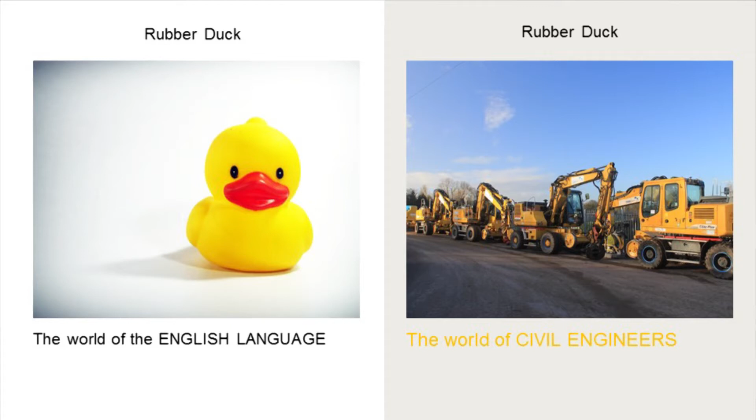I'd like to talk to you this afternoon about something to get your energy levels up after lunch. I want to talk to you about rubber ducks. We've all had them, we've all owned one, probably got them at home in the bathroom. But the English language is our biggest enemy. P-way engineers in the room, quick show of hands - you all speak English, you all know what you mean when you say bring me a rubber duck to site, don't you? Civil engineers in the room, quick show of hands - when you bring a rubber duck to site, it looks a bit more like this. We've got a problem here, guys, haven't we? We're talking a different language. We're saying the same words, the same English language, but it means something completely different depending on your point of view.

So when we talk about platforms, it's all about the focus. What's our perspective on life? As a civil engineer, this is my point of view, this is my focus - the coper. I don't know my pacer from my pendolino. And the X and Y standard deviation speech we had before lunch, that was way over my head. I take my hat off to you guys, P-way designers, I was struggling to follow some of the maths there, far too complicated. Civil engineering, we like things simple. We like to know where we're going.

But we've got to communicate better. This is our problem, I think. CEMs in the room, you'll know how difficult it is to chair IDC meetings - getting the civil CRE, the design CRE even, and the construction CRE from the same discipline to talk the same language can be difficult sometimes. But the consequences of getting that conversation wrong can be massive. Get it really wrong and we end up with conflict, we take chunks out of the concrete. Probably more likely we'll create difficult access. And for an ageing population, as we've just seen from Neil's presentation, this isn't acceptable to us in the railway anymore. We've got to look at ways to improve this.

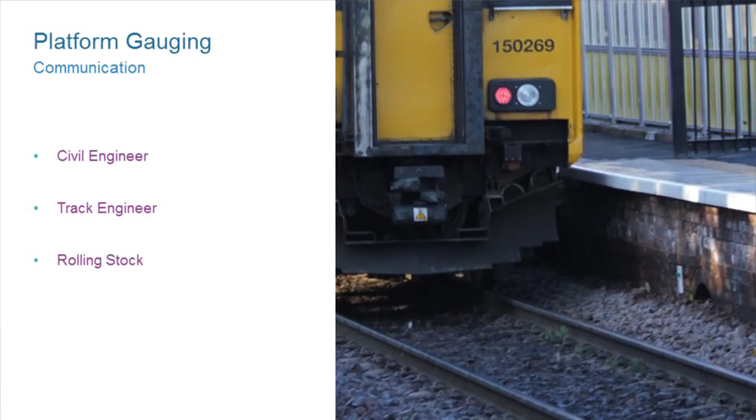So collectively we've got to get three communities to communicate better together. We've got to get our civil engineers to understand what the track and the rolling stock communities all want, and we've got to bring that together to get the perfect solution. And that means we've got to define our rubber duck, we've got to talk the same language. If we can all do that as a community, we've taken the first step of three steps into simple platform design.

So the next 10-15 minutes, I'll talk to you about some of the definitions. I was sweating a minute when Neil started to interpret group standards, but thankfully he said exactly the same as I'm going to tell you, so no worries there. I'm going to look at compliance and tolerances as well - does tolerance matter? And maybe break some of the misconceptions in the room. And I'm going to hand over to my colleague Nick Highton, who's going to talk about some of the challenges faced on site - how do we achieve these setting out strings and the tight tolerances to get us to this perfect stepping distance.

So the first thing I learned fairly recently, actually talking to some P-way engineers, which way is up? Where is the origin? Where is 0-0? And it comes back to this track design string, the maintained position of the track. Completely in agreement with Neil - this is a single point, it's a theoretical point. It is not where the running edge of your track is measured on site, it's a different thing. And the relationship is from that 0-0 origin to a space somewhere in that 730-915 envelope, somewhere. And that's where a little bit of the grey area starts.

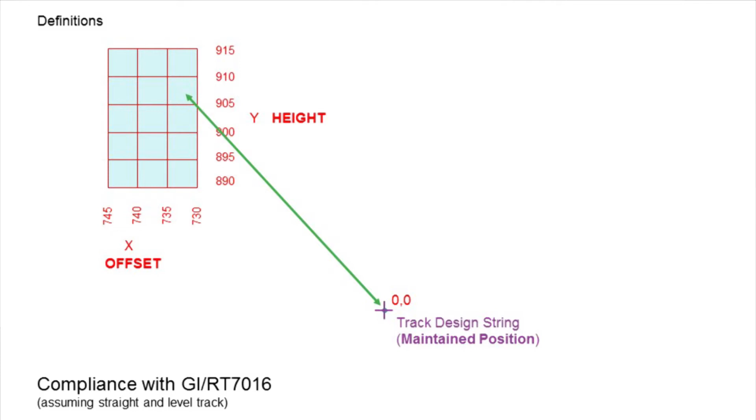I would point out at this point, this is straight and level track. When we get into curvature and cants, things do start to move around a little bit. And the grid system shown here is a 5mm grid. To put that in perspective, this grey box you see here, for those with a programme, there's a little grey box drawn to real size. For those with a mobile phone with a camera on the back, you've got a cover on it with a gap for that camera - it's about a similar size. So we try to lift this really heavy piece of concrete, the coper, and fit it down so that the edge, which is a curve, hasn't got a sharp edge on it - the theoretical edge of that corner is somewhere in that box, and it's not very well defined. So our rubber duck is already starting to look a little bit vague.

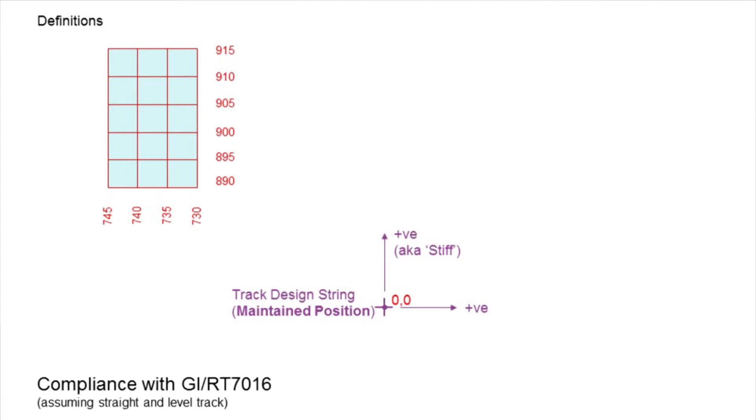So we've got to get some consistency in the P-way community. A positive dimension being measured on site needs to be vertically up or stiff in your language, not a lift and slew to go. Sometimes I've seen lift and slews to go with a positive number, meaning that the track is actually lower than that origin. So we start to get confusion, and we've got to overcome that.

Then we pass it on to the civil engineer. And what does he try to do? Well, there's this gauging position and a coping design string position that he wants to put in his 3D BIM model. And then there's this construction tolerance. So let me just take a moment to explain those three elements.

The gauging position is the top right-hand corner, as it appears on the screen, the highest, closest point relative to the track that we are going to allow a coper to be positioned to enable us to get positive clearance. That's not the same point that the civil engineer will use to position the corner of the coping stone in his 3D BIM model.

So he'll want a design string position which is in the centre of a construction tolerance. On here, the square in the middle is plus or minus 5mm tolerance, which most contractors tell us they can achieve. But actually, we've got a lot more space than plus or minus 5mm to give them, because they can end up anywhere in the blue box.

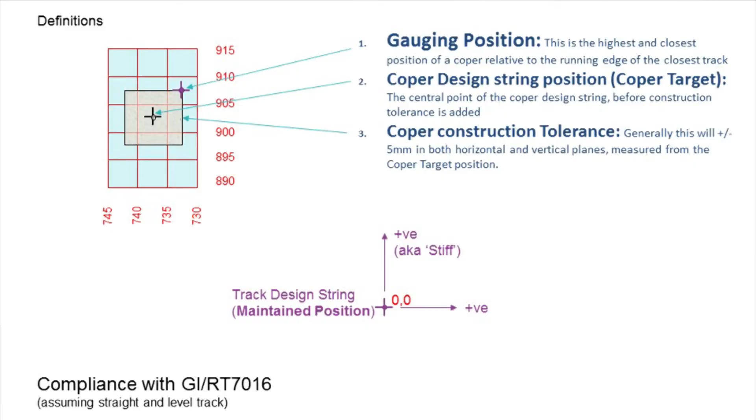So we don't need to restrict ourselves to that plus or minus 5mm. We can use more. And with Neil's new standard coming in a couple of weeks, we can go a little bit higher still. But that gauging position still needs to be the top right-hand corner of the box that you're going to allow the contractor to actually place the coper. So we've got to get the civil engineer and the P-way engineer to agree this green line relationship from the maintained position of track to the gauging position. So if that's step 2, getting that agreement in place.

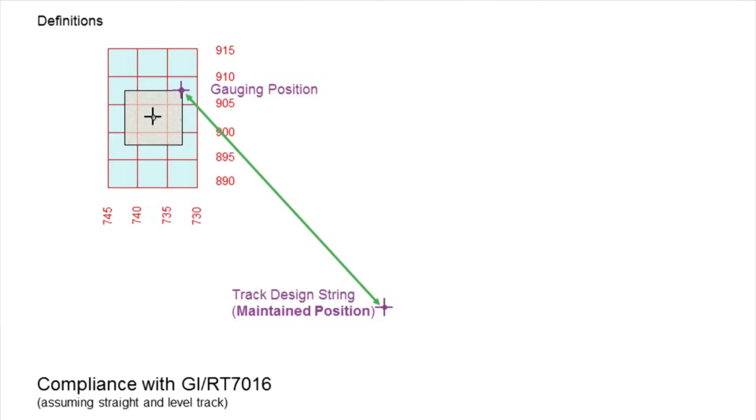Finally, when we look at the tolerance of the track, we've got a lot of conflicting ideas and thoughts around this. Where should the track actually go? What is low track fixity? Should I turn on high track fixity in my clear route? If my track ends up slightly away from that maintained position, the ideal design string, have I got to go and do all my gauging again?

There's a simple answer, and as long as the track you physically build on site is anywhere within this grey box appearing on screen here, and if you've done your gauging analysis with low track fixity switched on in clear route, you've demonstrated that for that gauging position you've agreed with the civil engineer, you have got a positive clearance. At that point, you could, if you wished, walk away.

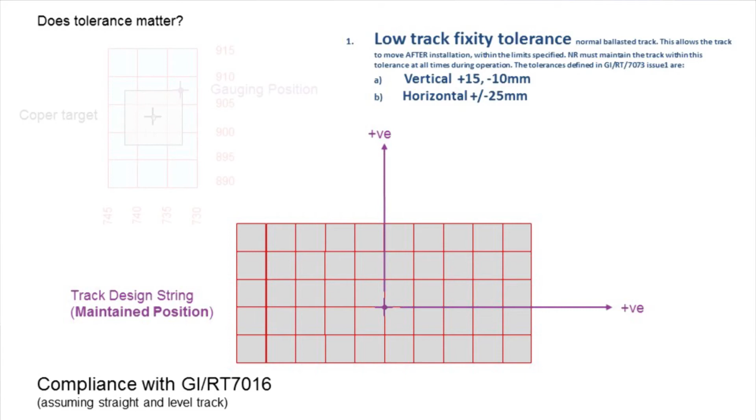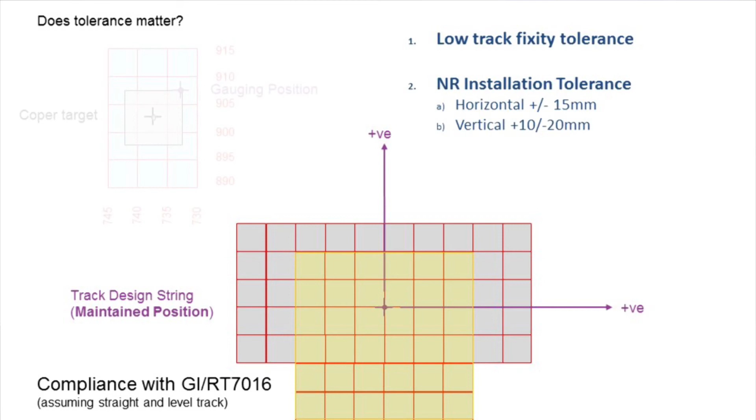So if you go to the bottom of your track installation tolerance, you've gone outside your guarantee of being gauge clear. So as a P-way engineer, you need to be a little bit smart about this, and really you need to start to think about this sweet spot, the green zone in the middle there.

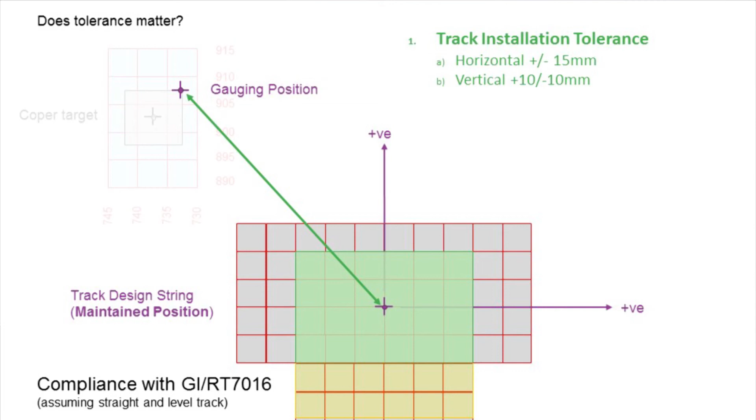So when you're doing your design drawings through a platform, the construction tolerance that you're putting on your track through that platform needs to be a bit more closely defined. Now, a really simple rule of thumb is plus or minus 10mm. For those of you that operate tampers and run tampers, all the feedback I've heard in recent months is that plus or minus 10mm is absolutely achievable.

And as long as the track is then maintained within plus or minus 10mm of that theoretical centre point, that design line, then you've got a perfectly compliant design. And I think the presentation before lunch, talking about the standard deviation, if we had throughout the network a 3D geometry for every track string, not only would it help us understand this a lot better, but it may help with some of those standard deviation issues that have been talked about as well. So that's my third simple step. Ensure we get the track tolerance clearly defined.

So just to summarise then, first step to success, document your rubber ducks, get them clearly defined and get everyone agreeing, talking the same language. Secondly, make sure that your gauging engineer, your civil engineer, and your track engineers all agree where your gauging position is. It's that highest, closest corner of where you're going to permit the coper to be. And the higher and closer that point can be, the more construction tolerance you're giving to your contractor, so that's a good thing.

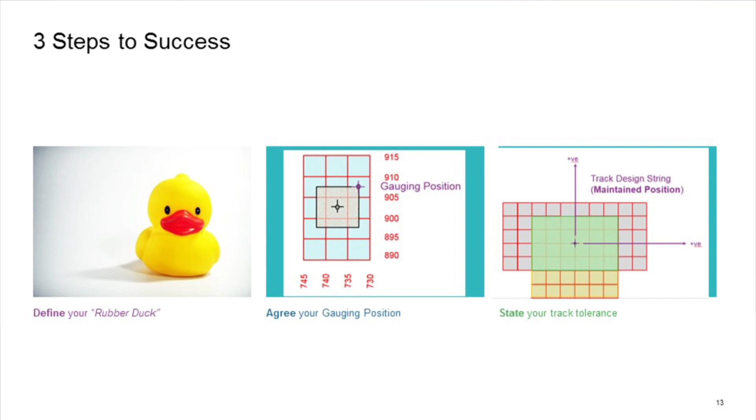And then finally, in terms of track, make sure that you're defining your track installation tolerance. Plus or minus 10 mil is a good rule of thumb to start with, if you need to go tighter than that. So that's it from me. Thank you. I'll hand over to Nick to talk to you about construction.